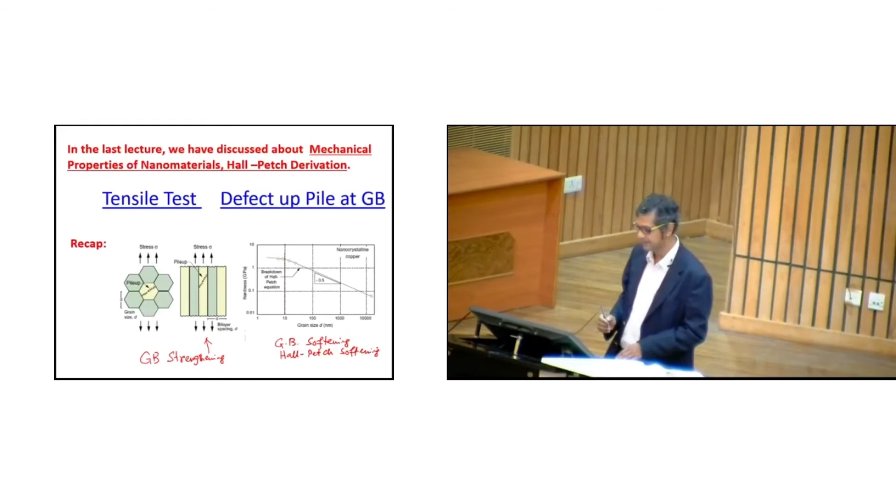This is known as grain boundary softening or Hall-Petch softening, because Hall-Petch is the relationship which dictates how grain size relates to the yield strength of the material or hardness of the material.

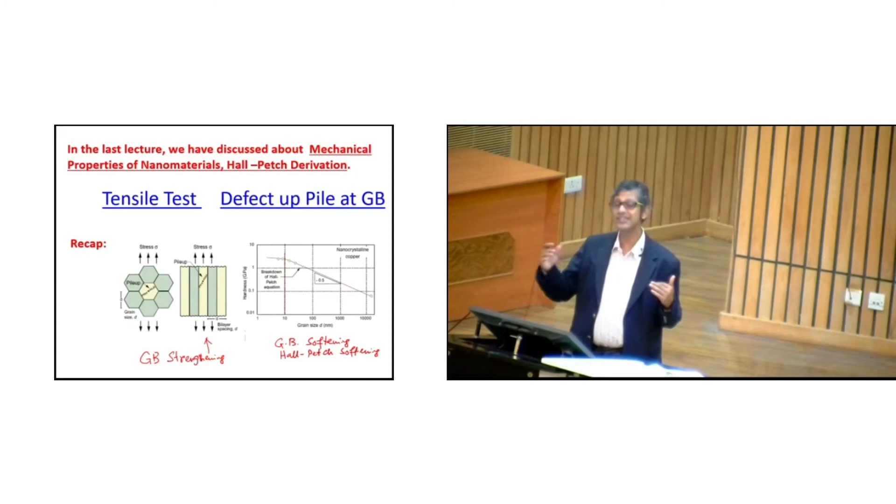So the basic model is known as the dislocation pile-up model of the grain boundaries. Dislocation generated from one grain boundary reaches the other grain boundary and gets piled up, and that leads to strength.

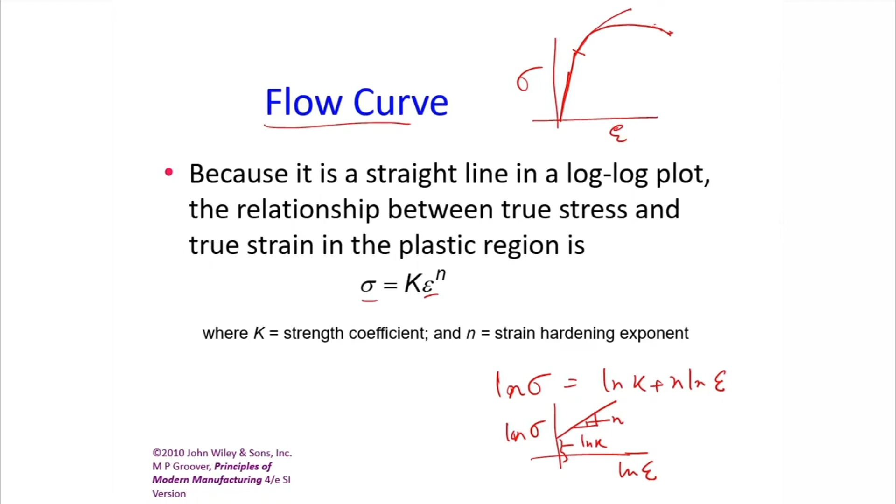Before we discuss further, we also discussed that we are mostly interested in the plastic portion of the stress-strain curve, not the elastic portion. Why? Because the yield strength demarcates the plastic and elastic portions of the stress-strain curve, so any strengthening happening in the elastic portion is not what we are interested in. We are mostly interested in the plastic region, which is known as the flow curve.

Normally the flow curve is given by the equation sigma equals k epsilon to the power n, where sigma is the true stress, epsilon is the true strain, k is known as the strength coefficient, and n is popularly known as the strain hardening exponent. This relationship governs the stress-strain behavior in the plastic part of the flow curve very nicely. The important parameters decided by the material are k and n, and remember, n is an exponent.

Normally, it is less than 1, so therefore it is a fraction. And hence this relationship between sigma and epsilon is too much dependent on this parameter n, because n value changing will lead to significant change in the flow curve.

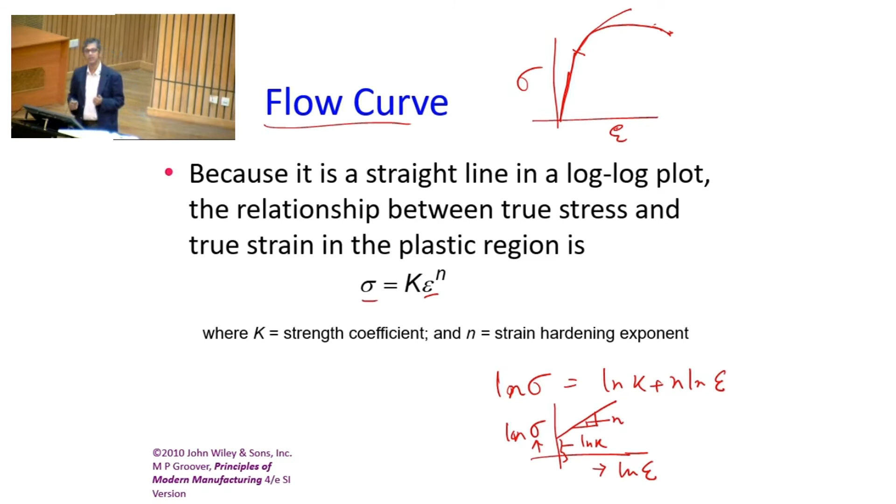You can always determine the value of n by taking a log on both sides, as shown in this derivation I did in the last lecture. The slope of the curve of log sigma versus log epsilon provides you the value of n, and n is a very basic material property.

Most of the cases you may not be able to measure tensile properties of material because of sample size limitation, or accessibility to the tensile testing machine. So in those cases, we use hardness as a parameter for obtainment of mechanical properties, mostly the strength. Hardness is nothing but resistance to permanent indentation or deformation.

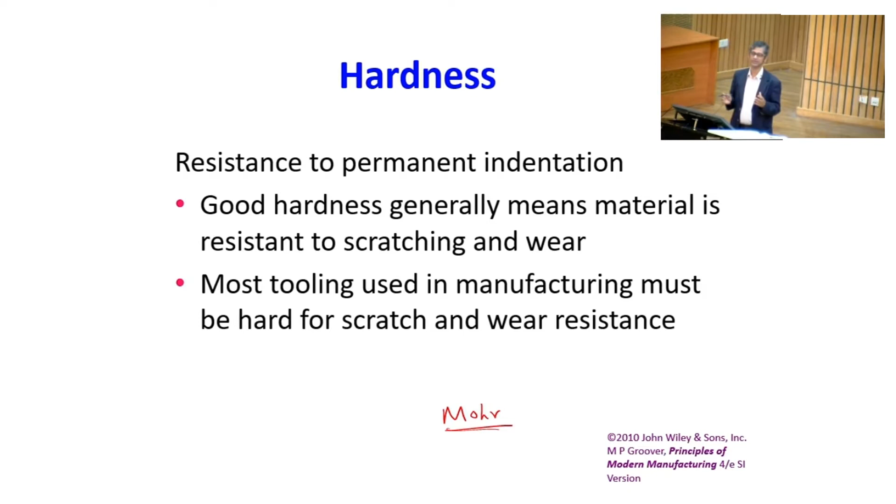Any resistance to scratching and wear is related to hardness. Most tooling used in manufacturing must be hard for scratch and wear resistance. Think of your shaving blade - it must be scratch and wear resistant because you use it to cut something, which requires it to retain a sharp edge. If it gets blunt because of scratch or wear, it doesn't serve the purpose. So there are many such things used in day-to-day life that need to be hard, and therefore hardness is used as a measure of strength, a measure of scratch and wear resistance.

This resistance to permanent deformation is related to the line defects, or defects rather, and movement of defects in the material. Most important defects are the line defects, and line defects are nothing but dislocations.

Dislocation can be viewed - the motion of dislocation is viewed as a rug with a fold. When you are using a carpet, if you have a rug and give a light tapping on it, that rug moves slowly with the fold, because it is easy to move it over the carpet without much application of force.

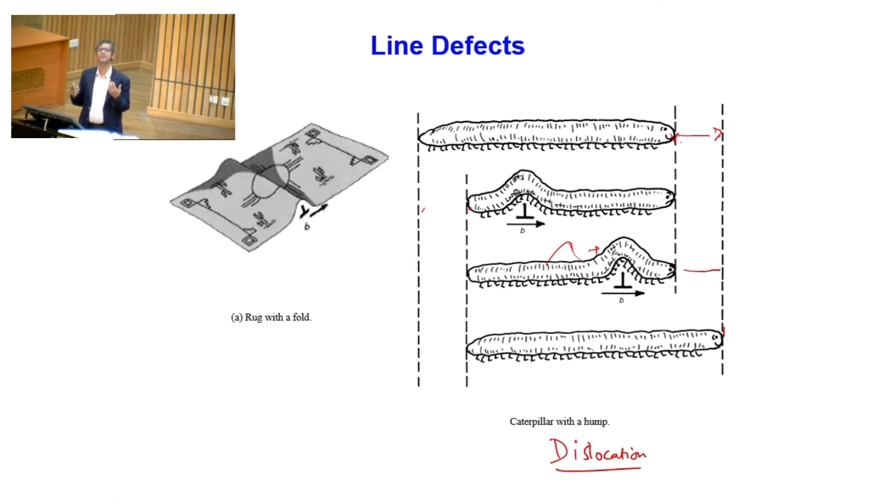Something similar is true for a caterpillar. Caterpillar movement can be easily thought of as similar to a dislocation moving in a material. How is it done? Caterpillar moves only a small part of its body, not the whole body like us - when we walk, we walk with the whole body. But the caterpillar moves only a small part, and that movement is transmitted from one part of the body to the other, so the whole process leads to a finite displacement. As you can see, from here to there, finite displacement is possible simply by making a fold in the body. That's how dislocation actually moves in a material, and that's obvious because this motion requires much lower energy than breaking the bond altogether in the material.

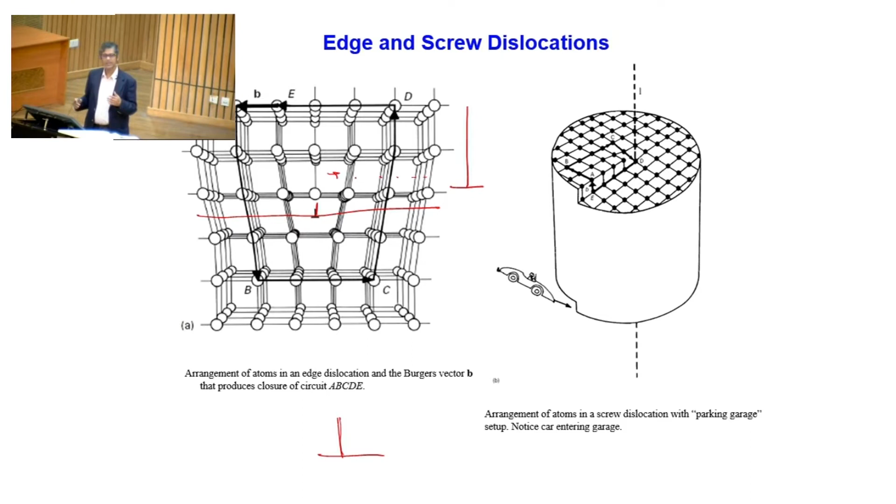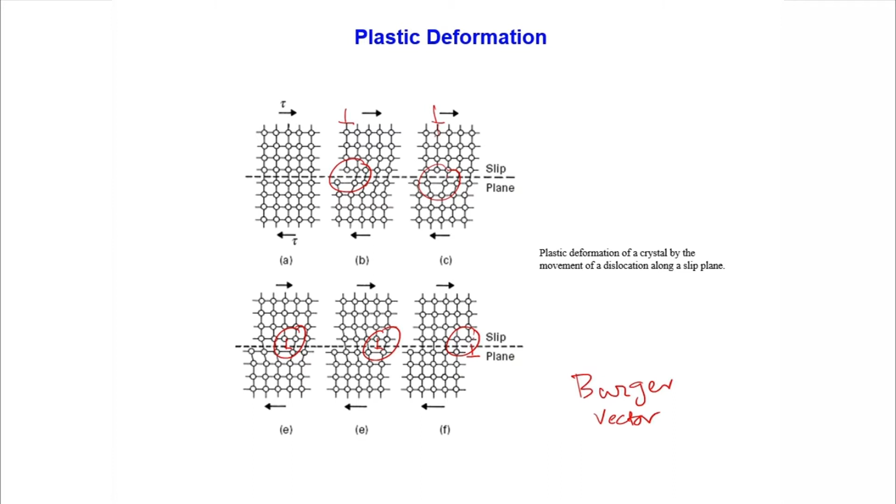Dislocation motion in the material happens by a small segment, known as a Burgers vector, and as the dislocation moves from one part of the crystal to the other, it leads to a step on the surface, which is nothing but a slip step. Remember, dislocation can move only on a slip plane, it cannot move on any other plane. So these slip planes are basically the closest packed planes in a material - in FCC, it's the 1-1-1 plane.

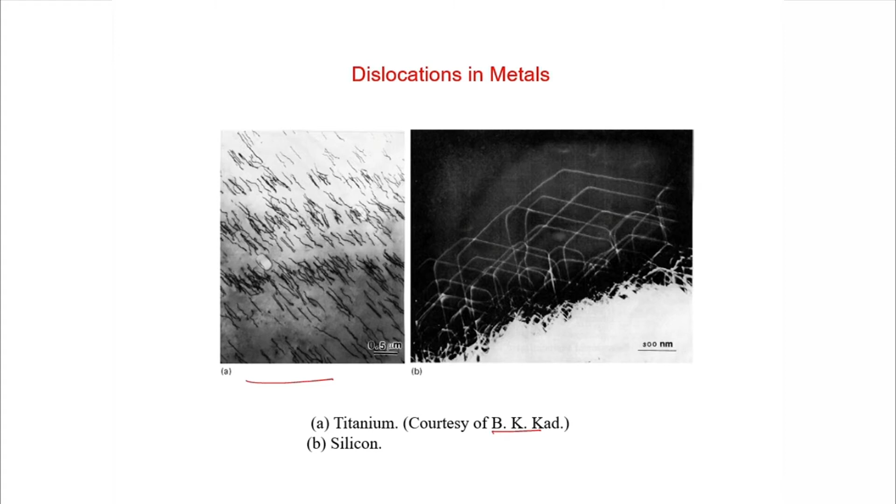How do you see dislocations? They can easily be seen using a transmission electron microscope. They are actually nanoscale objects, and they look like a line or a curve in the transmission electron microscope. This is dislocations in titanium and silicon. You can also have dislocations in ceramics like aluminum oxide or titanium carbide, and they also look like a line or curve.

They're similar, but remember, plasticity is because of dislocation motion - dislocation generation and motion. Only when these two things happen can you get some amount of plasticity. Otherwise, material breaks down in a brittle manner, like glass. If you throw a stone on glass, a windshield or any glass, it breaks down very easily, so there's no signature of plasticity at all in that kind of situation.

But on the contrary, most metals and many ceramics do show plastic deformation, and that's why these aspects come into picture. The Hall-Petch equation will be valid for those materials only. If you cannot generate dislocations, there will be no pile up, there will be nothing like Hall-Petch.

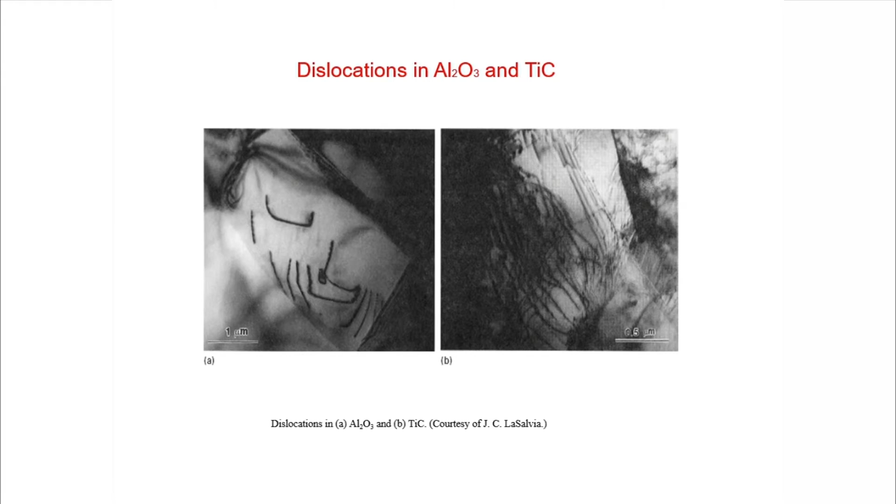Dislocations can be generated from the grain boundaries, because grain boundaries, as we have discussed a lot in our previous lectures, have some kind of lower order arrangements of atoms, or disordered arrangements of atoms - not perfectly disordered, but a disordered arrangement of atoms as compared to the grains. Therefore they can act as a source for dislocation generation, or otherwise you can have a Frank-Read source.

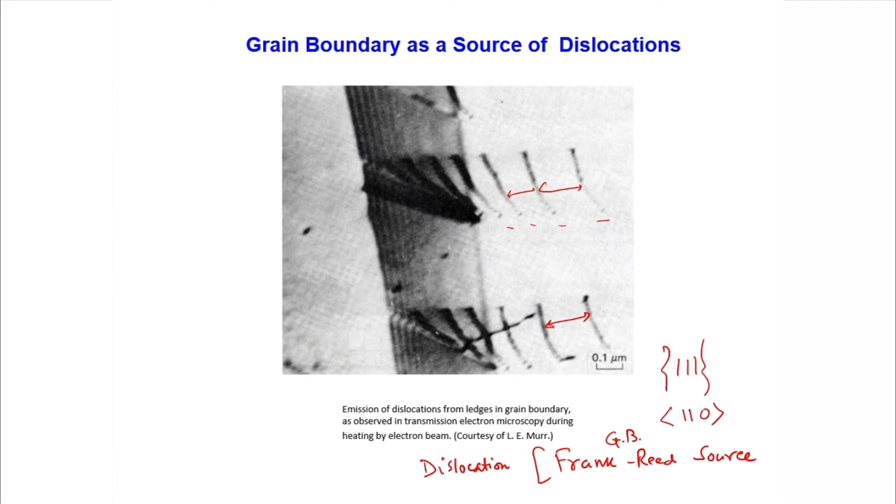That's also possible inside a grain. Both are possible - grain boundaries can act as a source of dislocation, or the Frank-Read source. Nonetheless, once a dislocation is generated, they move through the crystal and then go away. Once they move inside the crystal, sometimes they will also come into contact, face to face, with another grain boundary.

So very simple - you have a grain like this, and a dislocation generated from this grain boundary. They just move, you can see that, and then reach this grain boundary, where they find an obstacle present to cross over or cut over, and that's why they cannot move. So that means dislocations can be piled up if there is a grain boundary in front of them.

So you must be thinking - one side I'm telling you dislocations are generated from the grain boundary, other side dislocations are getting piled up at the grain boundaries. That's very simple. See, if you think of two grains like this, the fact is that there are two grains, their crystalline planes are not parallel to each other. That's why their orientations are different, that's why they are called two grains, right?

So now, if this is the slip plane on which dislocation is moving in grain 1, obviously on grain 2 the same plane will not be parallel, so the same plane is unlikely to be parallel. So dislocation cannot easily move across from one grain to the other grain because of this. Because dislocation, as I said, can only move on slip planes, and the fact that the slip planes are not parallel from one grain to another, they cannot cross over or move. Am I clear? So that's what actually makes the grain boundaries an obstacle, and the dislocation gets piled up.

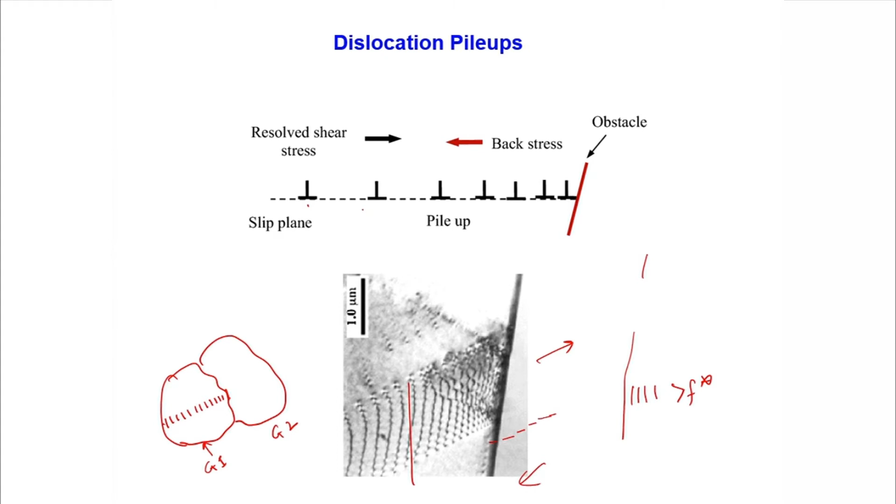Consider only the two-grain model which I discussed last time. In the first grain, dislocations are moving on a slip plane because of the application of shear force tau s, which is the critical resolved shear stress. This allows the dislocation to move on the slip plane and reach the grain boundary. Once the grain boundary is reached, the slip planes are not parallel to each other, so the dislocation cannot simply move across the grain boundary onto the slip plane on the other side. It's not possible, and because of this, they start piling up.

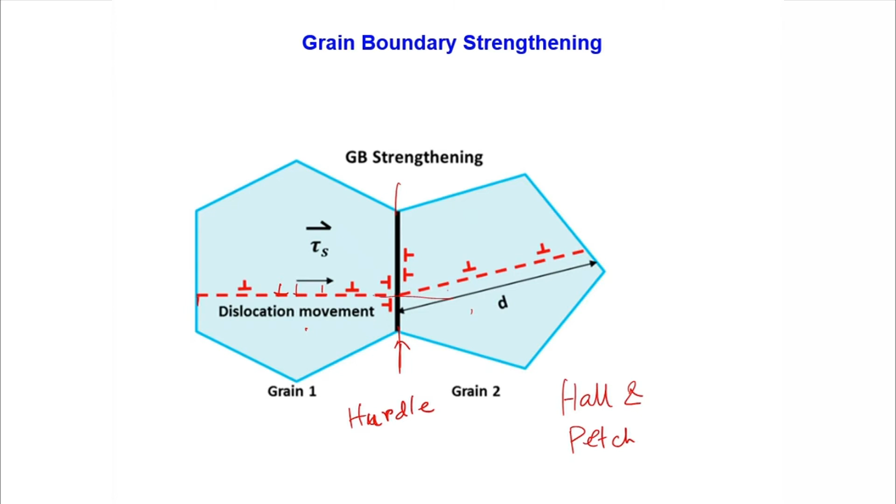Think of a bus in which people want to go inside, but the doors are closed. What will happen? They will pile up in front of the doors. But as soon as the door is open, all the passengers go inside, and the pile up is over. That's similar to when slip planes are parallel, the dislocation can easily move from one grain to another. So that's a very odd situation, very unlikely in normal grain structure materials, because grains have different orientations. Am I clear?

The central idea is that dislocations are forced to pile up at the grain boundaries, either because there is a barrier to cross over into the next grain, or because a source must be activated in the grains. These are the two important things you want to understand. First is the barrier to crossover - what is it? It's nothing but the slip planes not being parallel. Or it needs to activate a source in the other grain.

Whatever the slip plane is - in FCC crystals the most important slip plane is 111, because that is the closest packed plane, am I right? But dislocations can also move on 100 or 110 planes, though those require higher critical resolved shear stress. So suppose in this grain the dislocation is nicely oriented moving on the 111 plane, but in grain 2 that's not the case - maybe the plane is 110. So to start the dislocation movement process in the other grain, you need to create a source on the 110 plane. That's because the critical resolved shear stress to move a dislocation on a 110 plane is much higher than on a 111 plane, since 110 is not the closest packed plane in an FCC crystal.

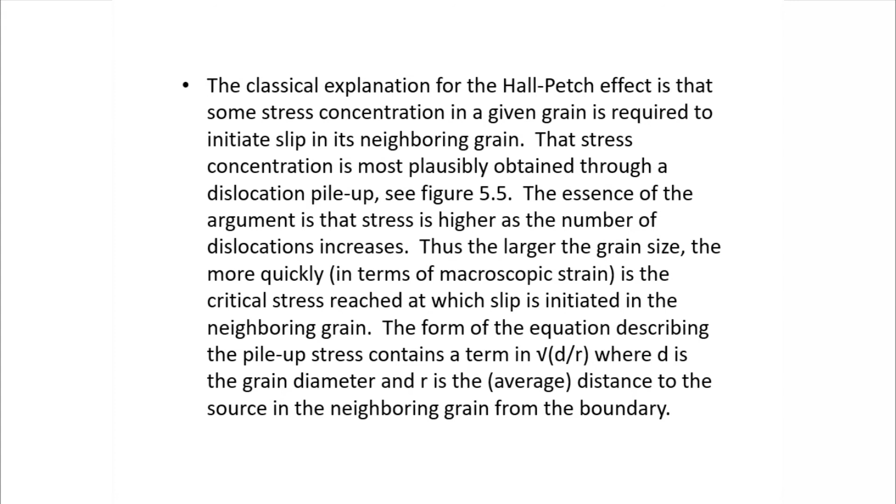That's very clear, right? So larger the grain size, more quickly in terms of macroscopic strain the critical stress is reached at which slip is initiated in the next grain. What does it mean? That means if the grain is bigger, you need less stress to start dislocation activity in the next grain. As the grain becomes smaller, you need more stress to start dislocation activity. That's how this actually happens.

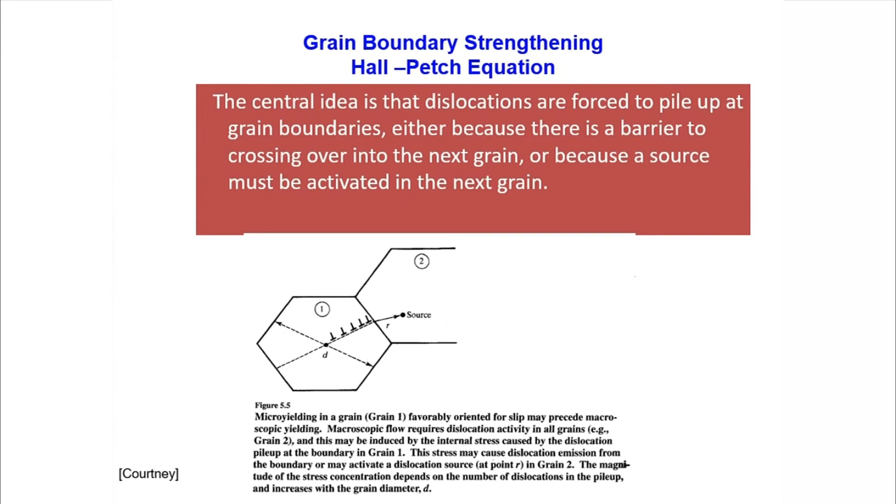Or the other way around: as the grain size becomes smaller, you have more grain boundary area, so more obstacles to dislocation motion, and that also contributes to strengthening. So you can understand there are two aspects to this.

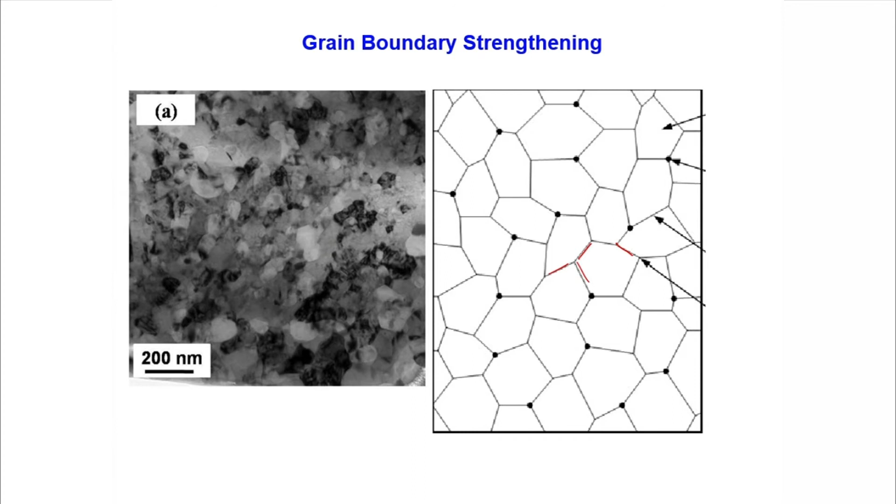This is what I showed you in bulk nanostructured material. You have a large number of small size nanostructure grains with very large grain boundaries. Therefore, dislocations find more difficulty moving from one grain to another. This is shown here also, but I am not going back into this.

So then I discussed the Hall-Petch equation, which I won't go back to again, only to tell you that mathematically we think of the grain boundary as acting as a barrier to dislocation motion. So we can think of the barrier as having a certain strength, and that strength can be F star, the critical strength required to be crossed over.

Now, the obstacle can be overcome only when the number of dislocations multiplied by the Burgers vector, that is the total displacement, into the critical resolved shear stress, that is the shear stress required for this process, gives tau minus tau zero greater than this obstacle value.

Now, n can also be related to these things by the size of the grain and many other parameters like Poisson's ratio, the vector, and the shear modulus G, which I've already discussed. Then we can do a mathematical analysis and find out the relationship.

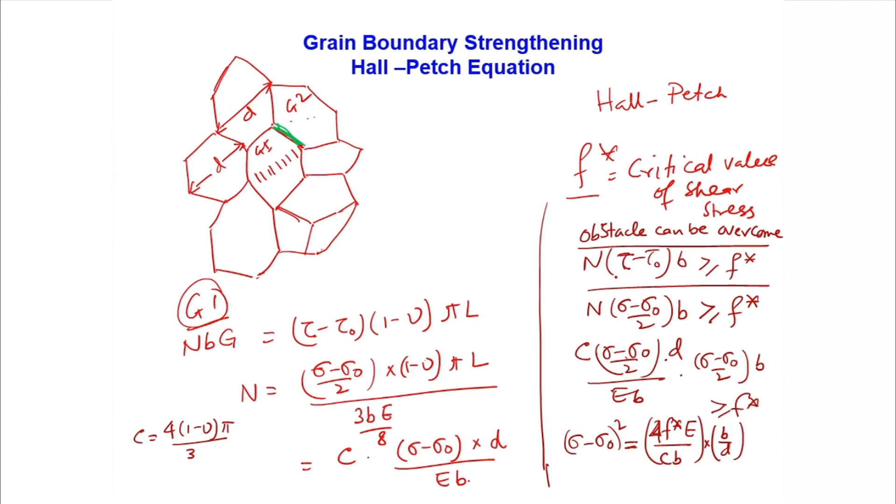That the sigma is equal to sigma zero plus k prime divided by d to the power half, and that is the classical Hall-Petch equation, in which k prime is a coefficient which can have values between 5 to 15 GPa, and sigma zero is a constant value. So sigma is the yield strength.

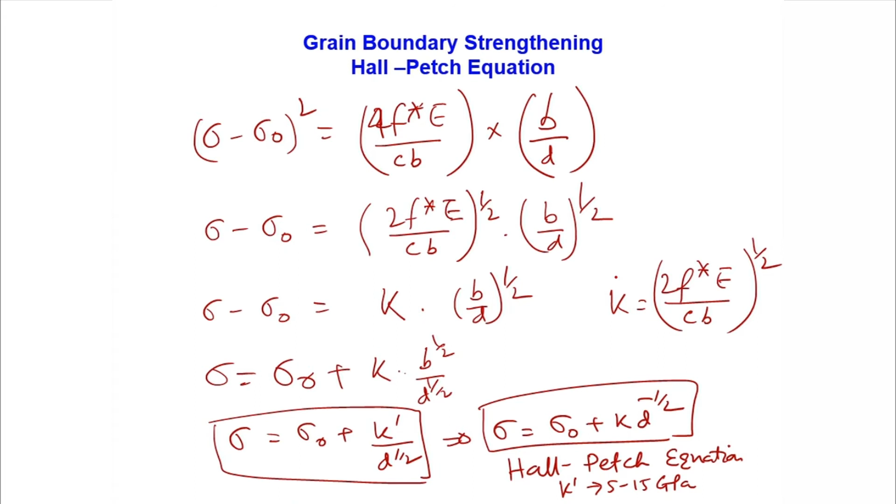So you can see yield strength is directly proportional to d to the power minus half, or inversely proportional to root d, whatever way you want to take it.

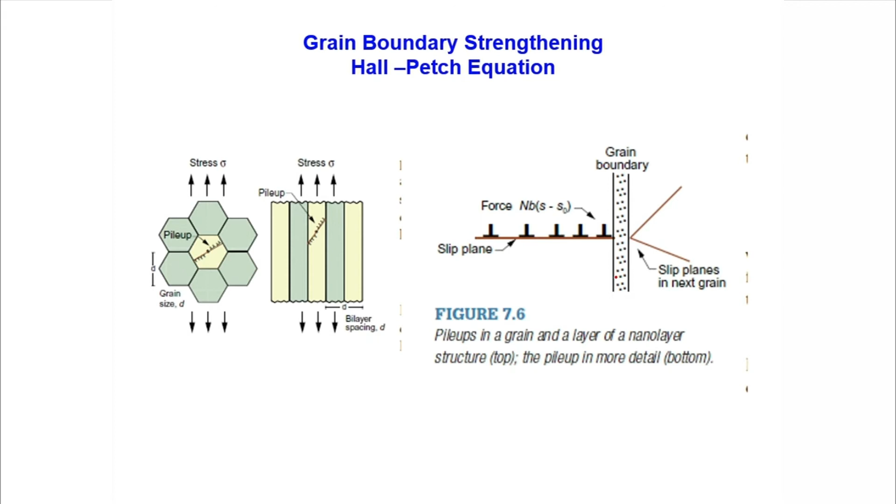And this is what I discussed at the beginning of the lecture, and I'm telling you again and again so that you do not forget.

K has values in gigapascal, or milli or mega, this is mega Newton per meter to the power three by two. Okay, that is what it is.

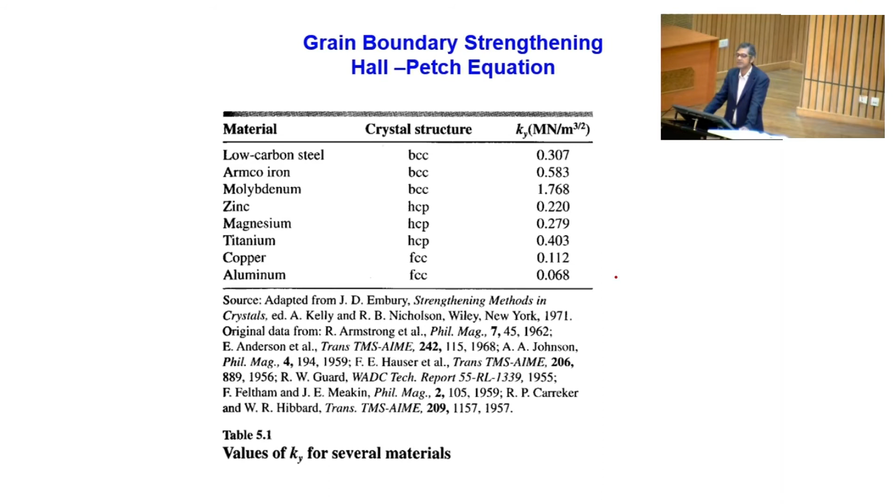This is taken from the book of J.D. Embury, Strengthening Methods in Crystals, and many others - Kelly and Johnson, or maybe some other papers also referenced here. As you can see, BCC metals have very high values of K.

This is taken from Petch's equation, Petch's original paper from 1953, and now you can clearly see the dependence of brittle fracture stress on grain size at 77 Kelvin. You can clearly see that for mild steel, ingot iron, and spectrographic iron, all of them fall on one line, sigma versus d to the power minus half.

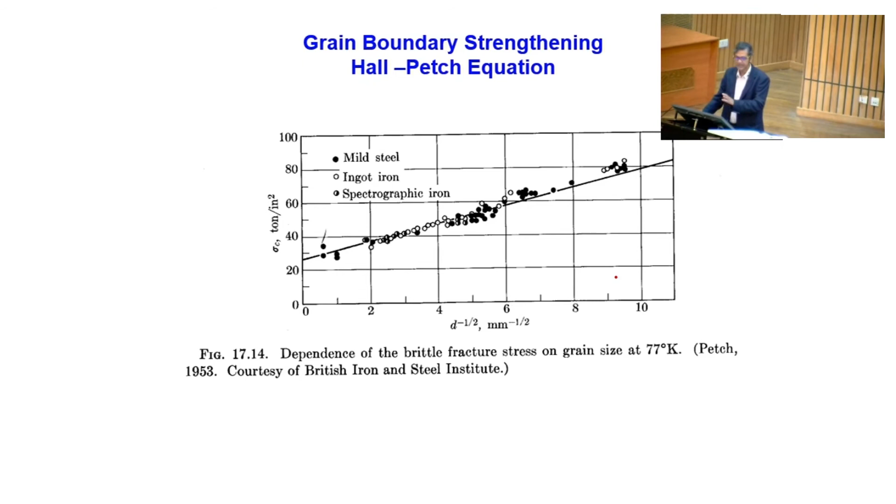That also tells us that this equation can very nicely describe the whole behavior of grain size dependence on strength. But in those days, in 1953, there was no concept of nanocrystalline grains. Although they were there, people didn't know about it.

Once we could prepare materials with nanocrystalline grains and start measuring them, researchers have seen the strength can increase sometimes 3 to 4 times. You can clearly see that 1 becomes 3 or 4 - it becomes triple or even 4 times.

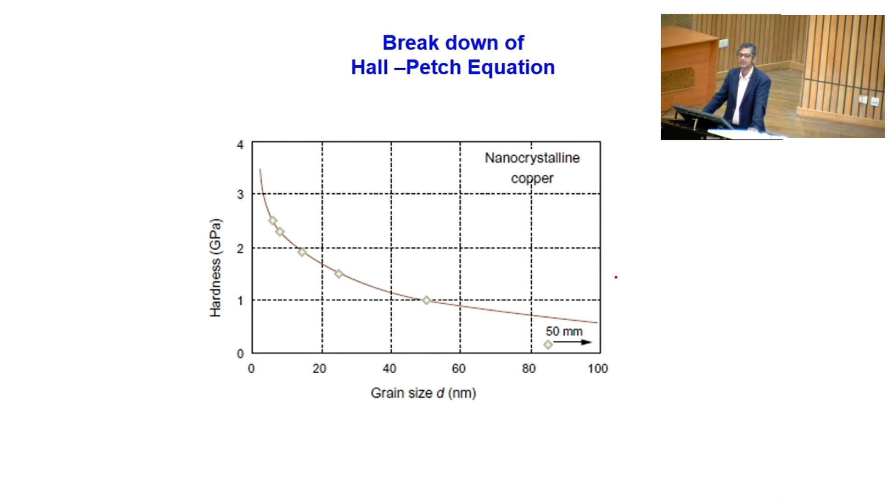Not order of magnitude, but times actually. So from 50 nanometers to about 10 nanometers, there's a drastic increase of hardness. That's possible for nanocrystalline copper.

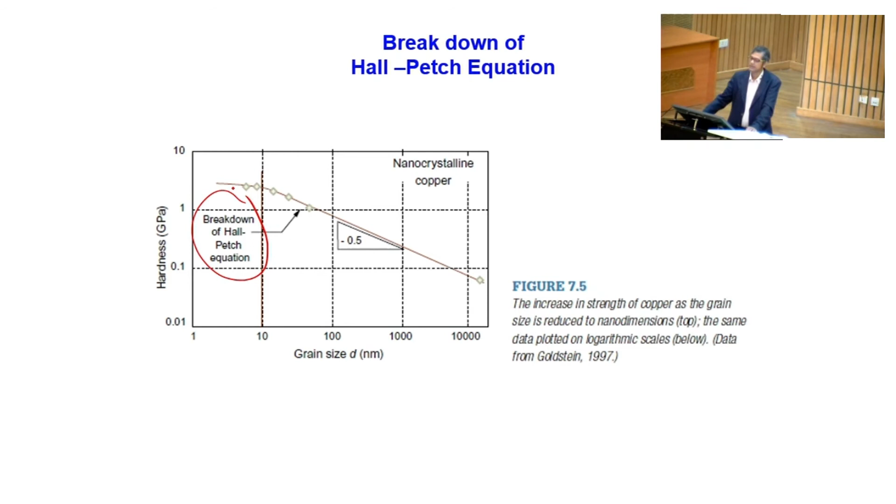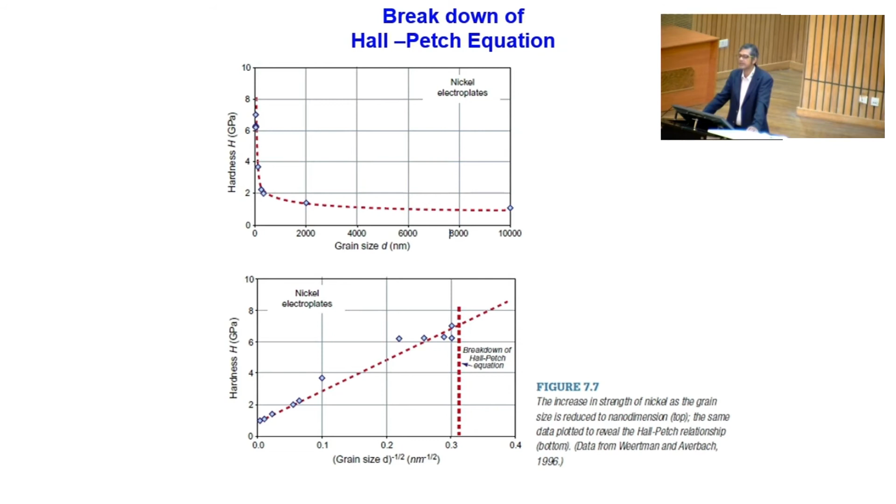Then we will discuss about that. Same thing happens for nanocrystalline nickel, and you can clearly see here also it's shown very nicely the breakdown of Hall-Petch equation. And there also I am showing you for multilayers.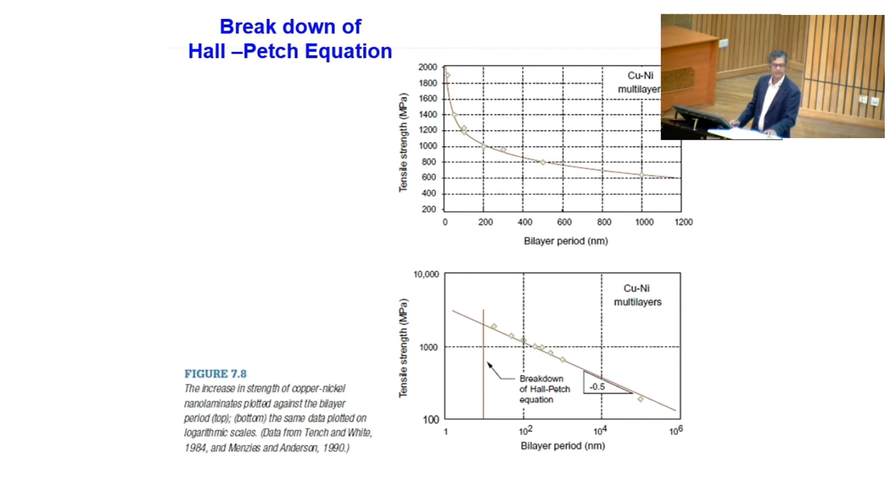So how does the Hall-Petch equation break down? That's very simple to understand. I'll go back to this picture and explain. Remember this picture. As you see, as the grain size decreases, only a fewer number of dislocations can be packed in the pileup. So I drew this last time also, I'm drawing again.

If I reduce the grain size, here you can have many dislocations pile up, but there it is getting reduced further. So what do you see? From here to there, then to there, fewer and fewer dislocations can be packed in the pileup. So if lower, obviously then lower is the magnifying effect. If you have more pileup, more is the back stress. Lower the pileup, lower the back stress.

So I can easily write, C d (sigma minus sigma 0) is equal to EB. That's one aspect. Second thing is this, let me erase this part and do it for you.

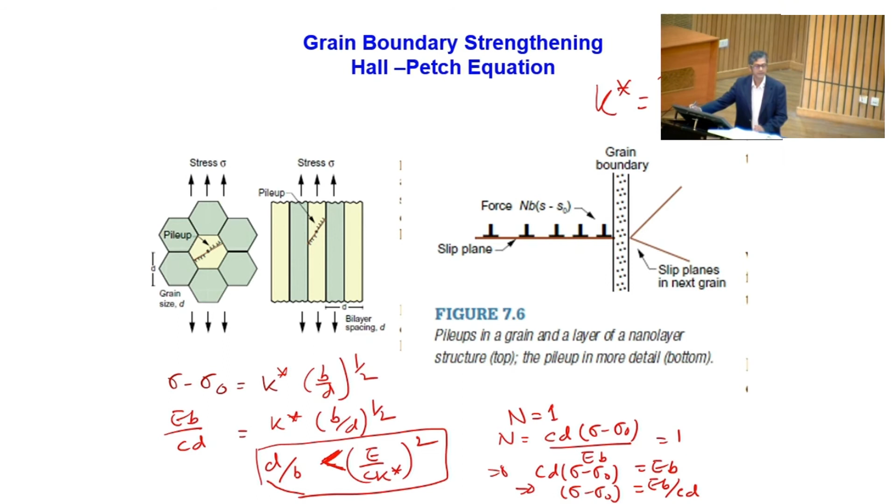And you know the value of k star. What is the value of k star? K star is equal to 2, F star is the obstacle strength, E, C, b to the power half. So the k star is dependent on obstacle strength, elastic modulus, and the Burgers vector. Constant C is obviously fixed for a particular material.

So that's it. That means when this condition is satisfied, the Hall-Petch equation will break down. The simple way of thinking is that if you have only one dislocation inside a grain, there is no pileup, so there is no grain boundary strengthening. If there is no pileup, there is no back stress, there is no grain boundary strengthening. That's why the Hall-Petch equation breaks down below a certain grain size. Am I clear? This is something you should always remember, this is the reason Hall-Petch equation breaks down.

So from a big grain, very big grain, okay let me just redraw this picture, I think I've drawn it pretty big, let me redraw it again. Like this, you have many dislocations piled up, gradually decreasing, until there is only one dislocation possible to be accommodated, and that's why this breakdown of Hall-Petch happens. That's why this equation, d by b less than or equal to E by (C k star) whole square, is happening, and you must remember these aspects.

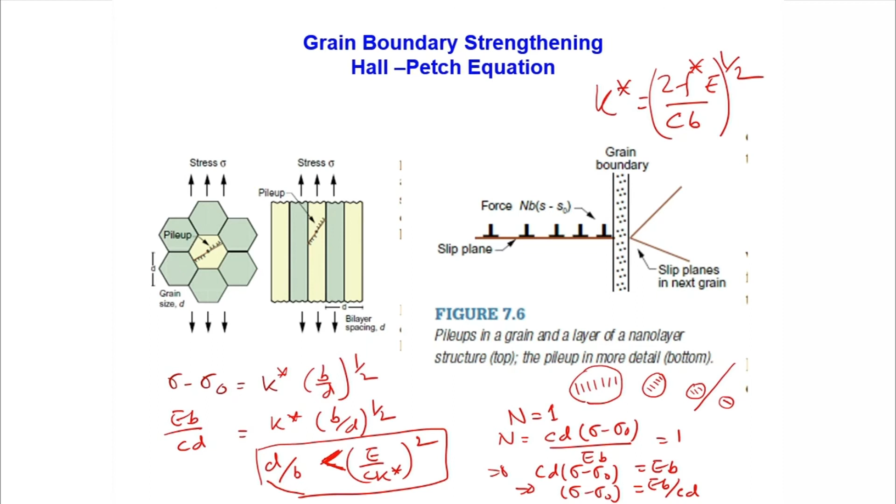So that's something you have probably understood. This is taken from a paper in Nature, 1998. You can clearly see this is basically hardness, and for grain size more than 20 nanometers versus less than 20 nanometers, I think for gold, you can clearly see both the Hall-Petch and the inverse Hall-Petch are possible. Hall-Petch obviously tells you that strength is increasing as d to the power minus half is increasing.

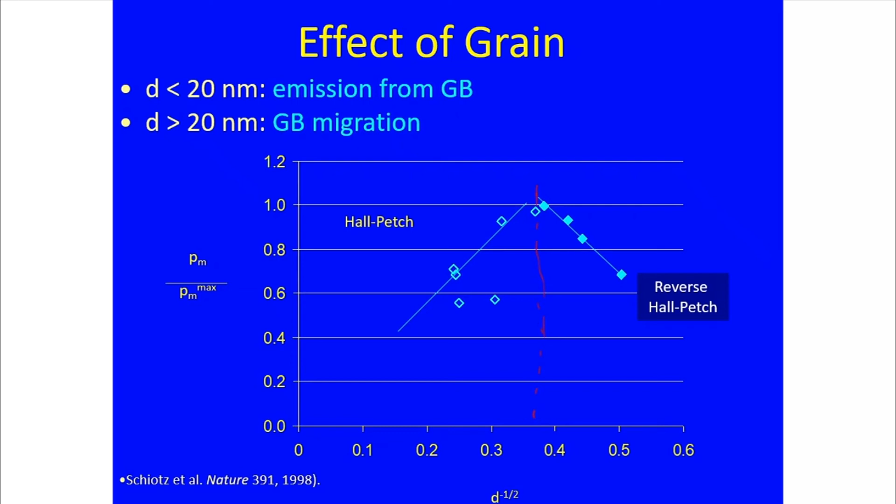Now this brings us to a very interesting thing. What does that mean? If you keep decreasing the grain size, you have seen the strength is not increasing, right? There's a point below which the strength decreases. Now if you still further decrease the grain size, what will happen? Have you ever thought about it?

Suppose the crystal size shrinks further until it becomes atomic dimensions, until it becomes 1 nanometer size or so. This is a question some of you have already been asking me. So if I decrease the crystalline size further, to 10, 5, 2, and 1 nanometer, the material now will be completely disordered. This is a nanocrystalline structure, in which you have ordered arrangement of atoms in the grains, and disordered arrangement of atoms in the boundaries.

Now, if you decrease the grain size to much smaller, atomic dimensions, the grain boundary area will be very large, and all the structure will be completely disordered. Many amorphous materials exist - window glass is an amorphous material, ordinary glass. Even metallic and ceramic materials can be glass. Polymer materials are also glass at present - polycarbonate, acrylic or plexiglass, or polystyrene, which is used as one of the materials for dress materials. The Burgers vector of dislocations

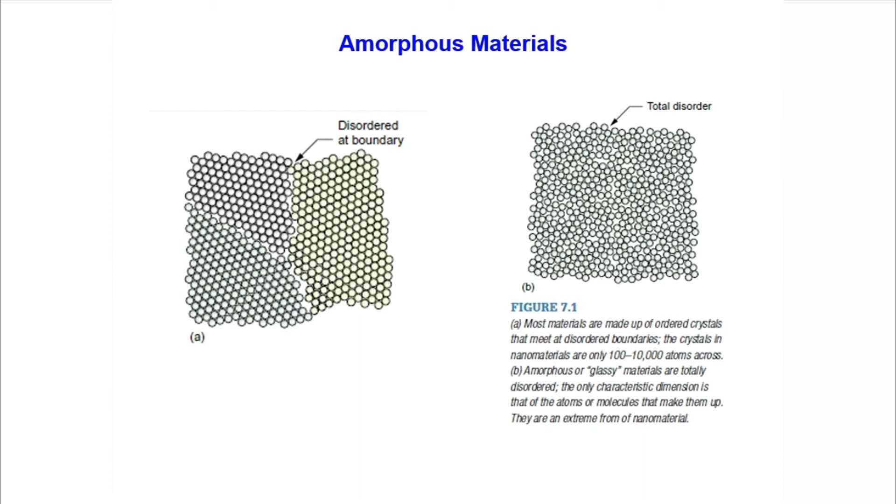cannot be defined even in amorphous material, right? So let us think of polymers. Polymers can be partially ordered or disordered, and many polymers have small crystalline regions in a disordered matrix, or you can also have polymers which are completely disordered. So the concept I'm talking about is also valid in these kinds of things.

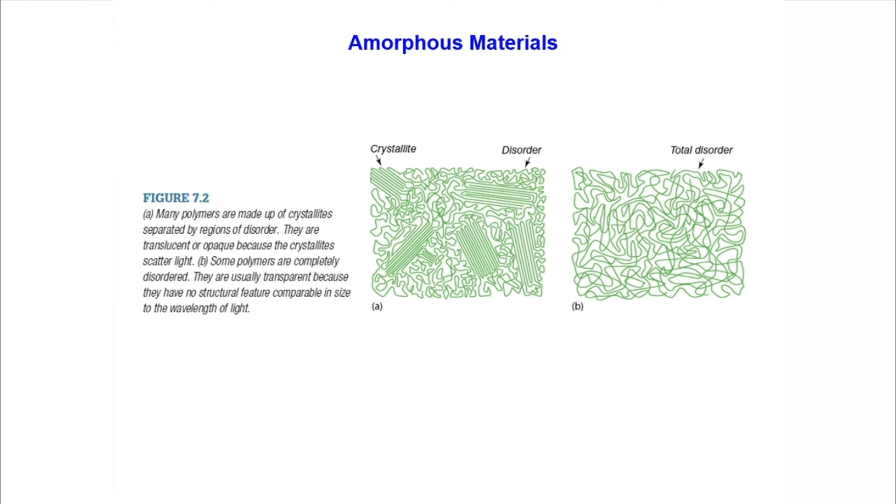Now, dislocations cannot be thought about in disordered materials, because the concept of dislocation is only valid for an ordered arrangement of atoms, since you're thinking of a slip plane, an extra plane movement of dislocations. That's only possible when you have a completely ordered arrangement of atoms. In a disordered arrangement of atoms, like an amorphous structure, you cannot think of dislocations - the dislocation concept will no longer be valid.

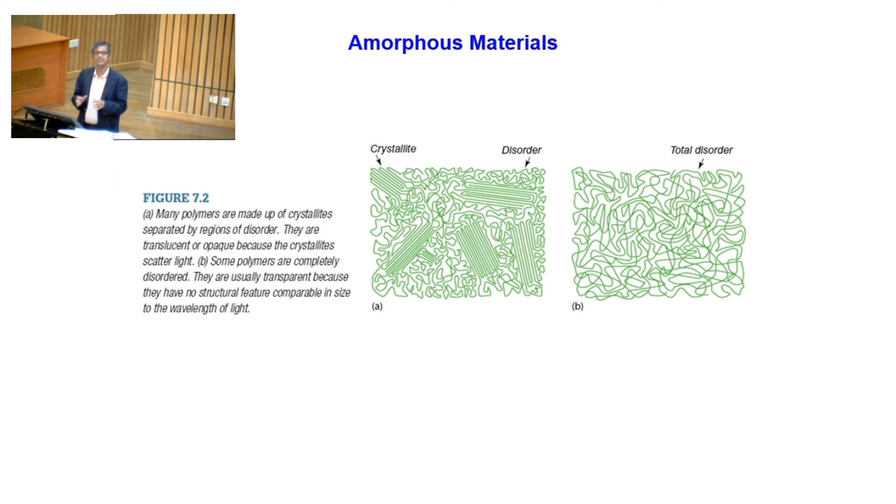So in such situations, the material has extremely high strength. You can't believe it - strength can go even further. If you decrease the grain size and make it amorphous, it can reach even 5-6 times the strength of the normal material, and people have seen it. But that increase of strength comes at the cost of ductility. Ductility and fracture toughness reduce substantially if you increase the strength this way.

So Michael Ashby, whose book is this, has given some charts. Here is one of those. There are many charts actually given in his book - I told you about the design of materials, mechanical design of materials, in which he talked about different kinds of charts to segregate materials depending on the type of properties you are looking at. One of the important properties is yield strength versus density.

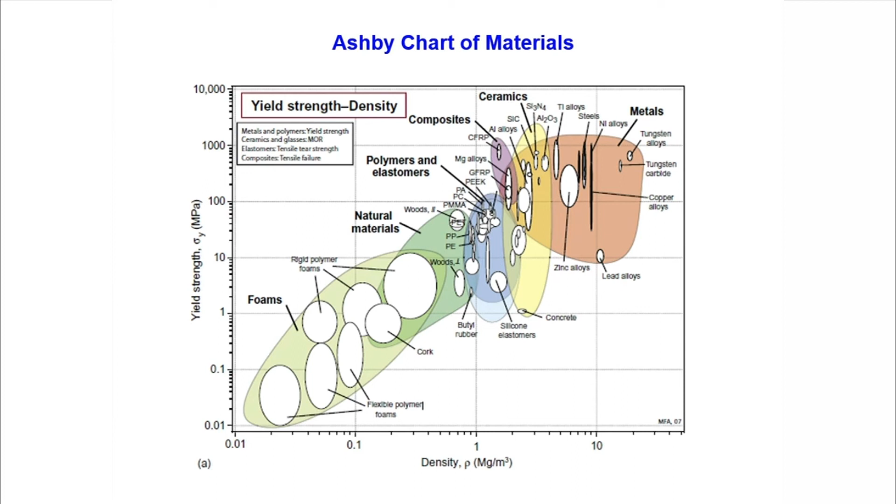You can clearly see most polymers will be on the left side because they are low strength, low density. Then come the natural materials, then metals, ceramics, and also composites. Metals always have high density compared to ceramics and polymers, so they will be positioned accordingly, but metals also have high strength. Now what happens to nanostructured materials?

That's what happens - if you make the same plot for different nanostructured materials, like here, you can see these are the nanowires of gold, silver, and copper, and then you have nanocrystalline metals, ceramics, nanocomposites, even CNT composites. You can clearly see the nanowires still win over the others. Nanowires can have yield strength of the order of 10 GPa.

Okay, that's very classical. Well, why is it so? That's because of separate discussions. But forget about nanowires. Even if you think of normal nanocrystalline materials, you can look at the yield strength of 1 GPa.

Normally steel has a yield strength of 200, 250, or maybe 300 MPa, correct? So we are talking about 1 GPa, 4 times higher than that. That's something which is very, very significantly high.

So you can also have ceramic nanocomposites having such a high strength with a density of about 10 or so, correct? So that means what? By making nanocrystalline materials, we can increase the strength further.

Amorphous ones will be much higher. They will be close to these nanowire designs or even much higher, something like about 10 to 15 GPa. Okay, many of these materials have such a high yield strength.

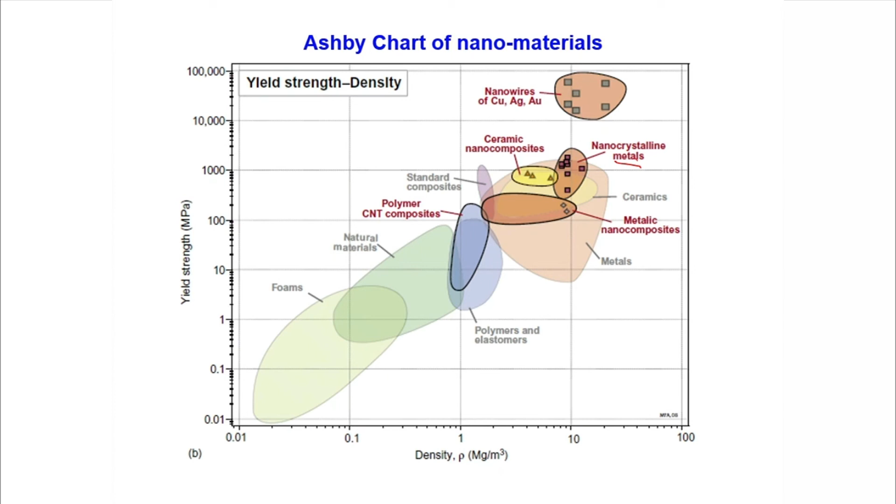So this winds up our discussion on the mechanical behavior of materials. So we're going to start a new topic, rather, not chapter. That's on the thermal properties.

Okay, what do you mean by thermal properties? Mechanical properties, you understand, you apply force, how the material behaves. Thermal properties, obviously, if you increase temperature or decrease temperature, how the material behaves. That's something which is very important.

So we are going to discuss or limit our discussion to these aspects, because as I said, this course is 1 semester long. So if I start discussing one subject for long, then what will happen? I'll miss out some other things, which many of you may not like.

Okay, so when you talk about thermal properties, the most important thing we talk about is the melting temperature of the material, right? Why is it important? Because the application temperature must be lower than the melting temperature of the material any time you are thinking of using a material, right?

That's something which will always be true. Am I clear? If you want to use it in an aero engine, which burns fuel at about 1200 degrees Celsius, the melting temperature of the material must be higher than that. Otherwise, the material will melt down and everything will be gone.

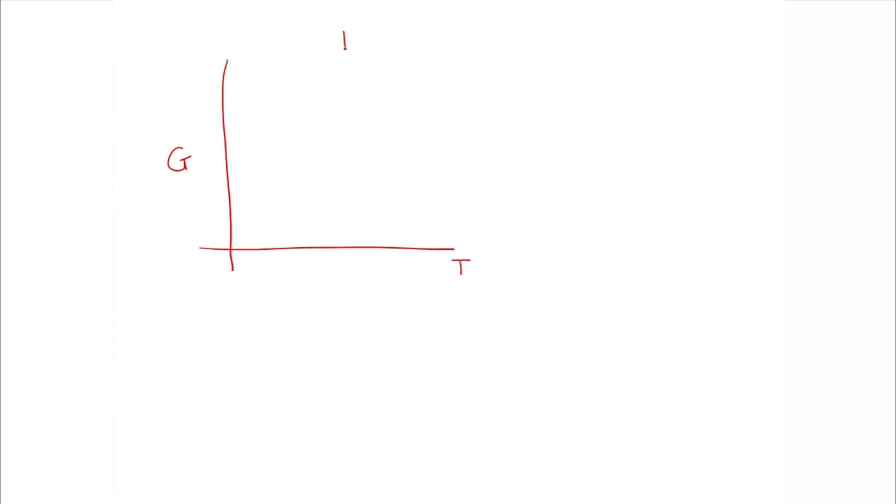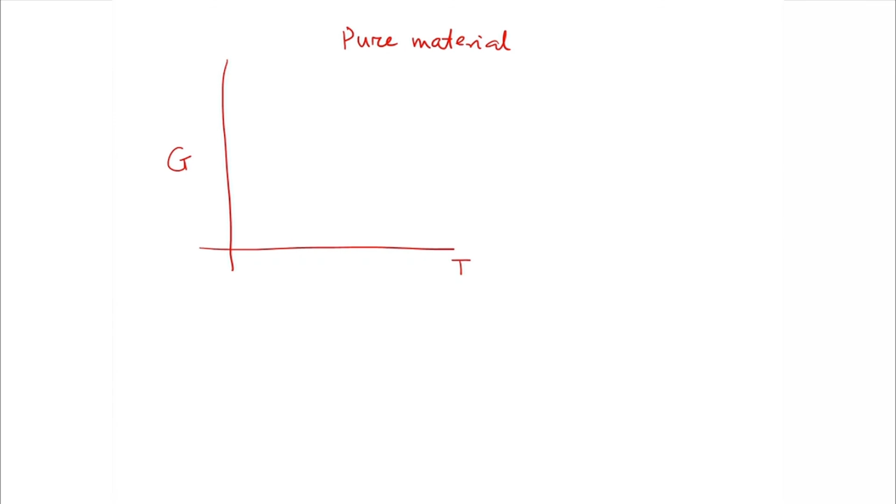Correct. So for a pure metal, suppose if I plot G, the free energy, versus temperature for any pure material, okay, like pure water, pure iron, or maybe pure titanium, pure polyethylene, okay, it's a single compound. So you know that the G versus temperature curve will have a certain shape, you know that, right?

G is equal to H minus TS, and if you do dG, finally you get VdP minus TdS, right? So del G by del T at constant pressure is equal to minus... what will it be? It will be entropy, right? And del G by del P at constant temperature is equal to volume.

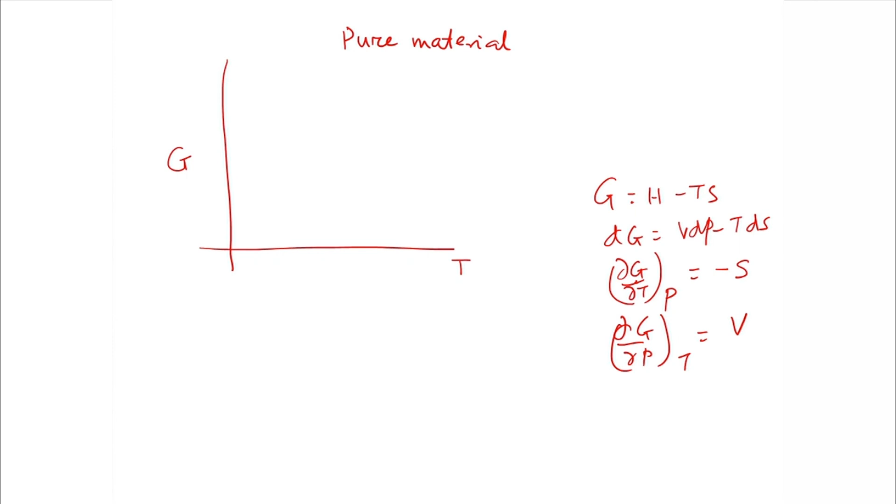Correct? So that means what? That means very simply that the slope of this curve G versus T will be negative, because entropy is always positive. S is the entropy. Entropy is always positive, it cannot be negative, right? So because there is a negative sign, it has to be a negative slope. That's why in most cases they go down like this.

Okay, let me just draw it properly and show you. This is a very important concept which you know very well. So suppose this is the free energy for the liquid phase of the pure material, let's suppose this is free energy for water, liquid water.

So what will happen to the free energy of the solid ice? Let me draw using a different color. Obviously, below the melting temperature, free energy of the solid will be lower. Above the melting temperature, free energy of the solid will be higher. Let us suppose this is solid.

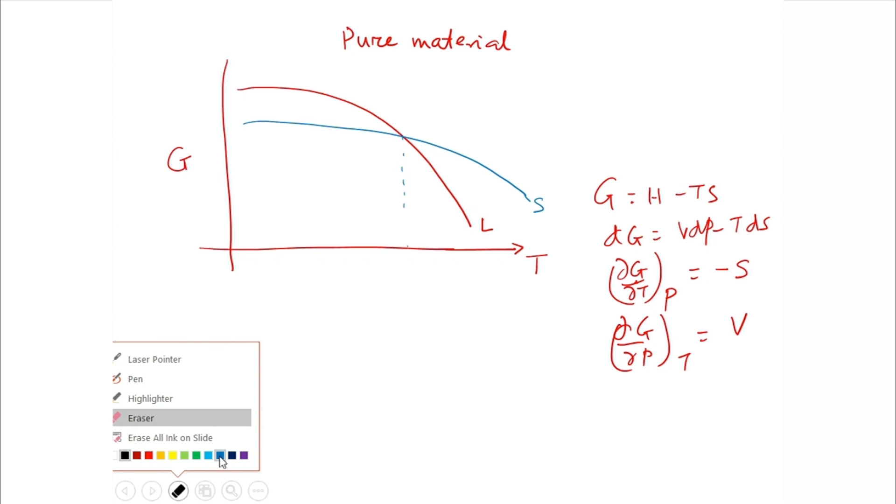And therefore, you can see here, this is the crossover point. That's where the free energy of the two phases are equal. This must be melting temperature, because at the melting temperature, at T equal to Tm, G of liquid phase must equal G of solid phase. Then only they will coexist. Otherwise, why would they coexist? At 0 degree Celsius temperature, both ice and water exist.

So this is the most important fact. But below this, that means this is T less than Tm. Below this, you can see GL, L for the liquid, for the solid. I am making a mistake, this is for the solid. For the solid, the free energy is lower than the liquid. You can see that, no?

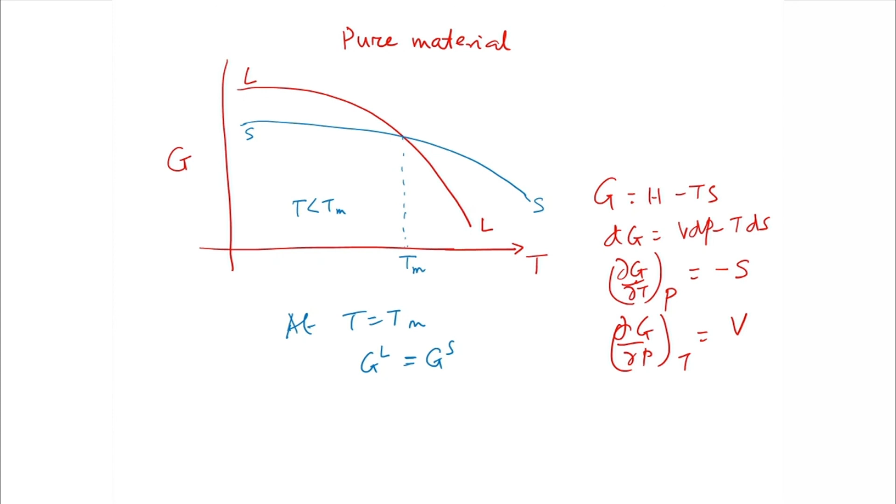So this kind of curve tells you the relative disposition of the free energy curves, and that tells you relative stability of the free energies. And on this side, this is T greater than Tm, liquid has a lower free energy than the solid. Correct? Am I clear? So therefore, in a bulk material, this is what happens, because in the bulk material, free energy is given by this. We don't consider any surface energy effects, because surfaces are neglected.

But as you know, for a nanocrystalline material, G total, I already told you, is G bulk plus G surface, right? This must be the case, you can no longer ignore it. So then, delta G total change - change is very important, right? Change is this, so this is the change here, or this is the change here. Change means difference from one to other, that's what change is. So delta G total is nothing but delta G bulk plus delta G surface, right?

So what is delta G bulk? You know that? You don't know, well that's okay, if you don't know there's no problem. Delta G bulk can be easily calculated. Let me tell you, delta G is from this equation. All right, let us start from the beginning. So G is H minus TS. And then dG is equal to dH minus T dS at constant temperature, correct?